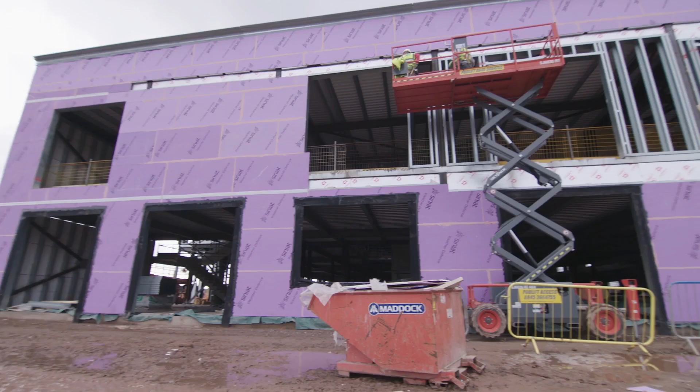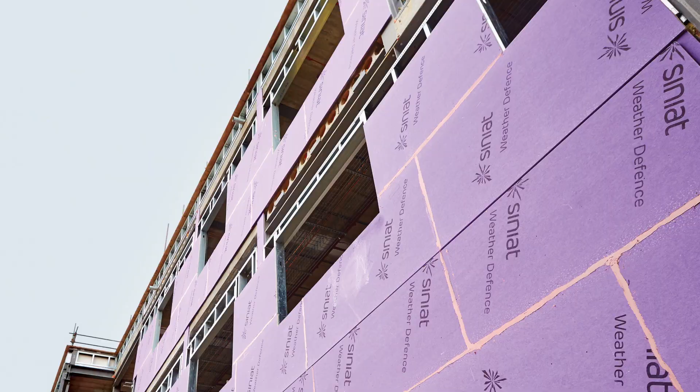Weather Defence is an external sheathing board, which is now often used instead of cement particle board. It's made from gypsum and has a water-resistant liner. It has been around since 2013, and a second generation version launched in 2017, which can now be left exposed on frame for up to 12 months.

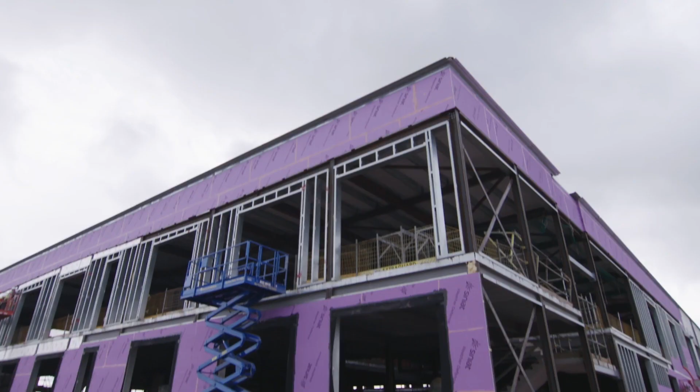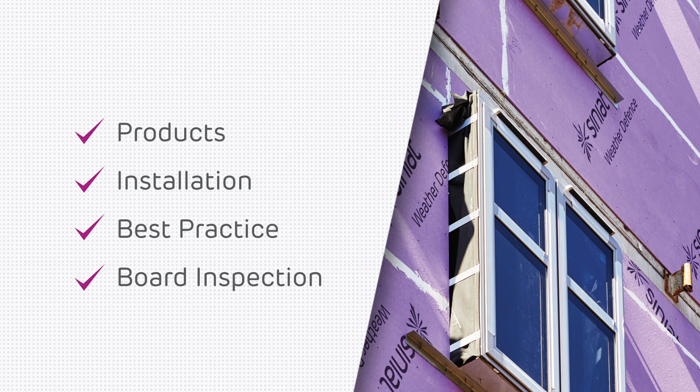The big benefit is that it's easy to cut, and therefore fast to install. This video will show you how to install Weather Defence correctly, looking at products, installation, best practice, and board inspection. First, let's take a look at the products you'll need.

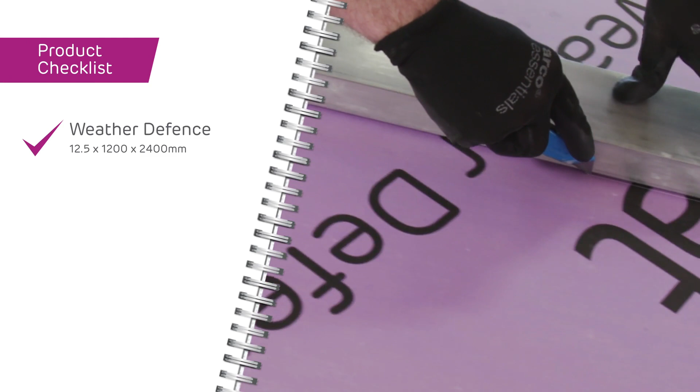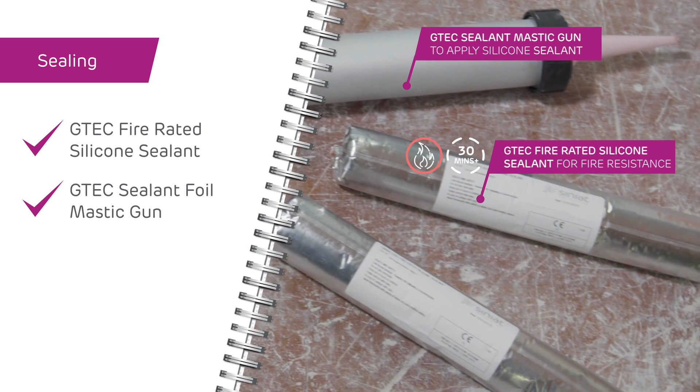The Weather Defence board. Special GTEC wet area screws. These are for external use and have a salt spray resistant coating. And you'll need to seal the joints either with fire-rated sealant silicone or with Weather Defence joint tape, which can be used instead of silicone sealant in all other systems. To cut Weather Defence, you use a Stanley knife or similar.

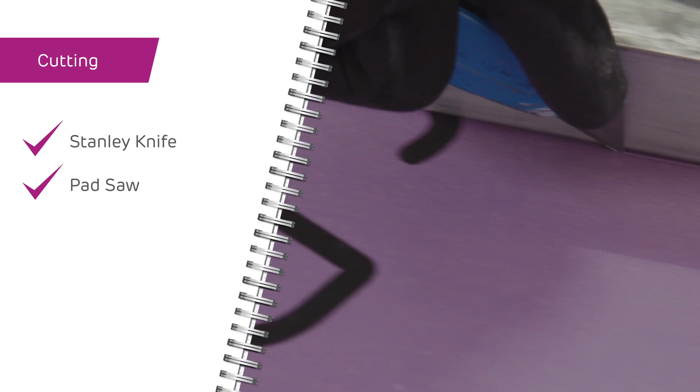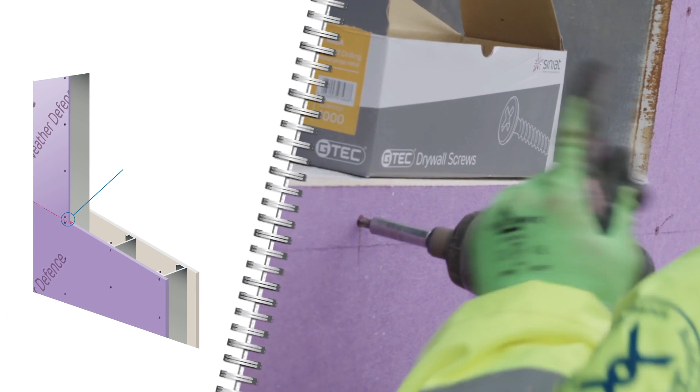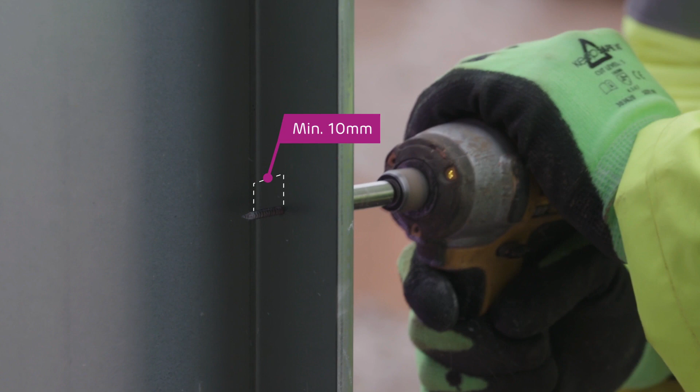In most cases, boards are installed horizontally in a staggered brick bond pattern. But if necessary, boards can be installed vertically to suit window openings and sizes. Place screws at least 13 mm and no more than 20 mm from board edges, and penetrate at least 10 mm into the substrate, or 25 mm for a timber frame. Fix to studs at a maximum of 300 mm centres.

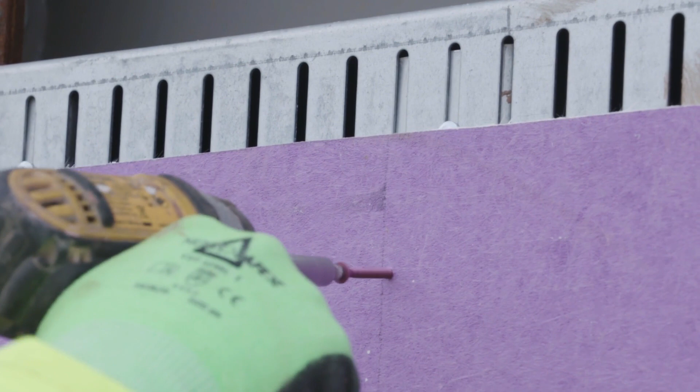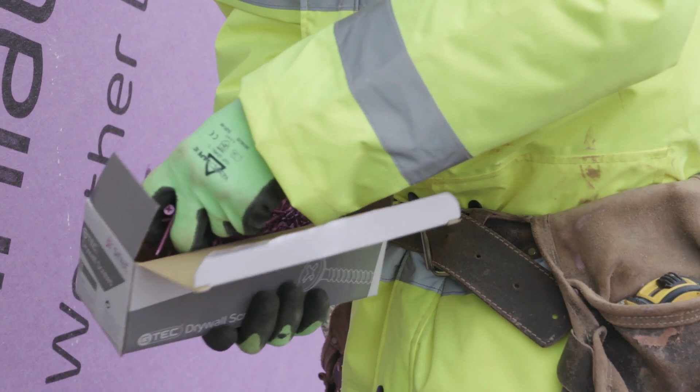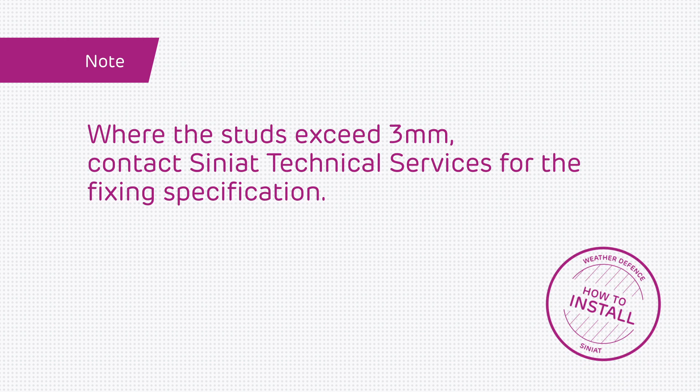If your project requires a higher wind loading, the fixings and studs will need to be at closer centres. Ask your project engineer about this. Use GTEC wet area self-drilling screws for steel studs or combinations of studs up to 3 mm thick in total. Where the studs exceed 3 mm, contact Siniat Technical Services for the fixing specification.

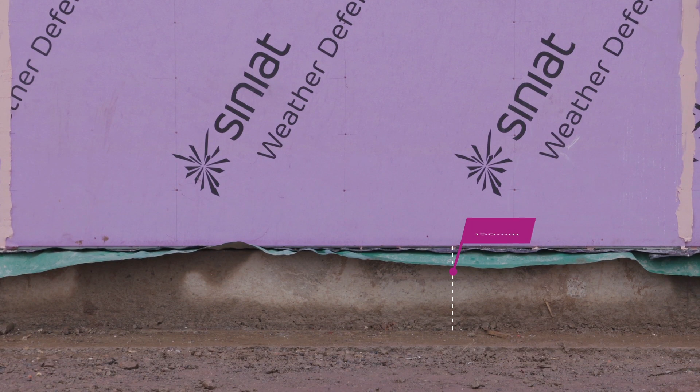Although Weather Defence doesn't mind getting wet, separate the board from areas where water may pool by at least 5 mm. Boards should also be installed above the DPC level and 150 mm above ground level.

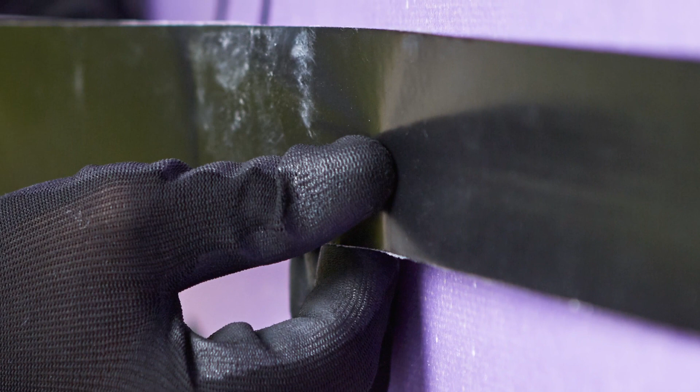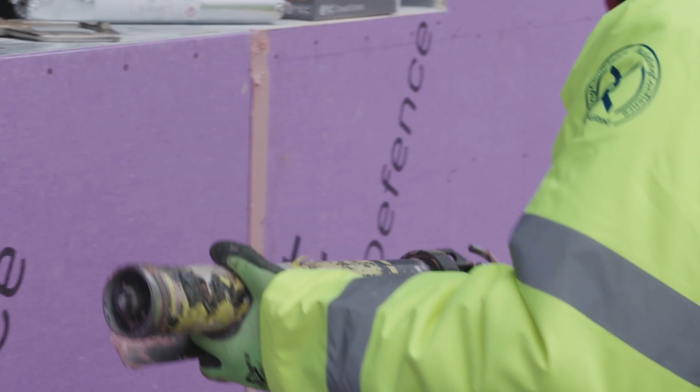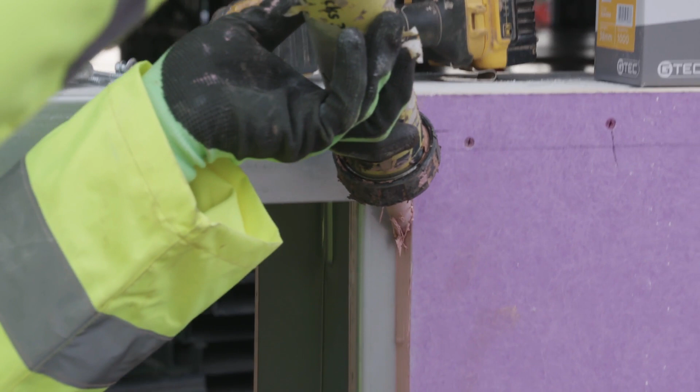Which sealing option you choose depends on your project requirements. Weather Defence joint tape may be used when only air and rain tightness are required. But if you also require fire and sound resistance, the Siniat fire-rated silicone sealant should be used. A silicone sealant provides a robust weather seal as it allows two boards to be squeezed together to prevent water and air leakage. As boarding progresses, apply the sealant along the previously fixed board edge before installing the next board.

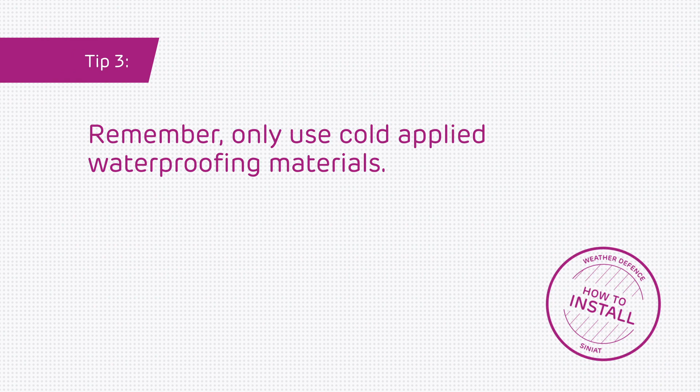You should aim to create a sealant joint of approximately 2 mm when the next board is loosely butted into place. Any gaps in the sealant should be filled with additional sealant. If a screw isn't perfectly flat, seal with a dab of sealant to prevent issues with weather tightness. Remember, only use cold-applied waterproofing materials. Cold-applied sealing methods should be used to seal deflection or movement joints created in the board layer. Compatibility with silicone sealant should be checked.

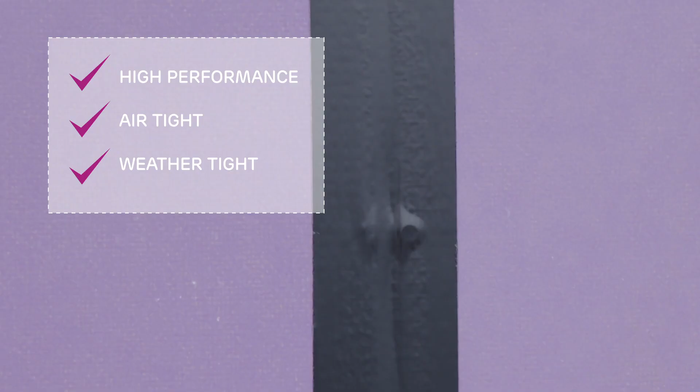Weather Defence joint tape provides a high-performing air and weather-tight seal between boards and can be used instead of silicone sealant in non-fire-rated systems. Weather Defence joint tape should not be used in combination with silicone sealant. If unavoidable, use an appropriate primer over the silicone joints before applying tape. Contact Siniat Technical Services for help with the correct primer. Weather Defence joint tape can be applied any time within the 12-month exposure period, but of course, before the joints are sealed, some water may penetrate.

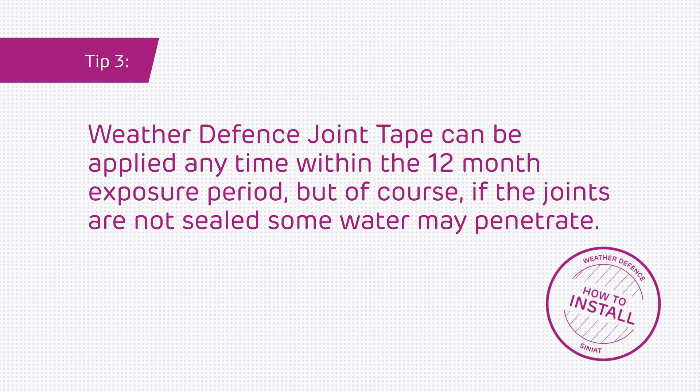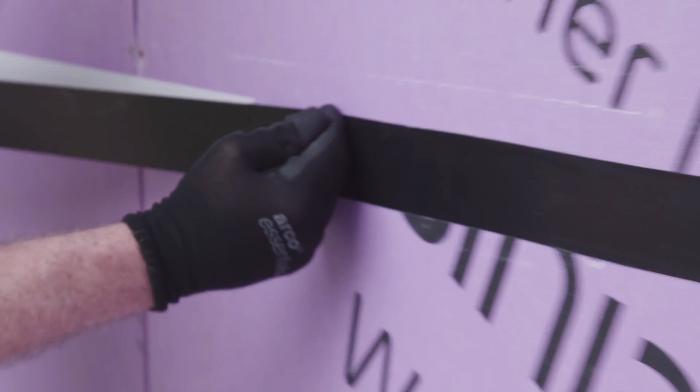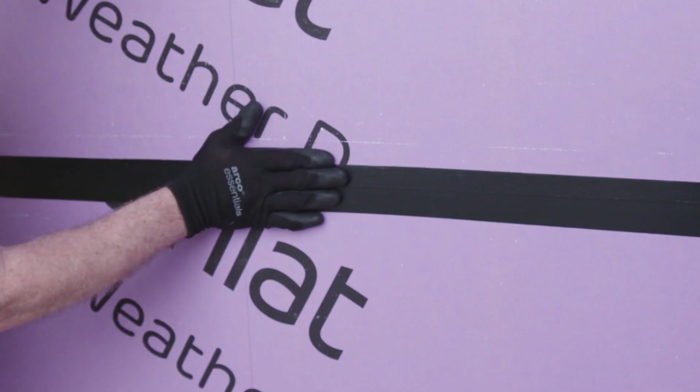Before application, ensure the surface is clean, dry and free of oil or dust, for example, as significant contamination will mean the tape does not adhere properly. Position the tape along the centre of the joint and peel back the backing paper as you progress. This will usually cover screw fixings. Apply the tape carefully, avoiding wrinkles or being overstretched. Firmly press and smooth down against the Weather Defence board.

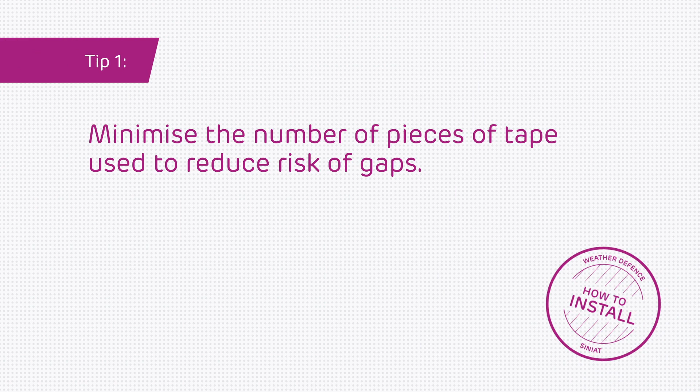Seal horizontal joints first and run tapes for vertical joints over the top of the horizontal band of tape. Minimise the number of pieces of tape used to reduce risk of gaps. If using tape pieces is unavoidable, overlap tapes by a minimum of 50 mm and ensure they are pressed firmly against the board and fully sealed.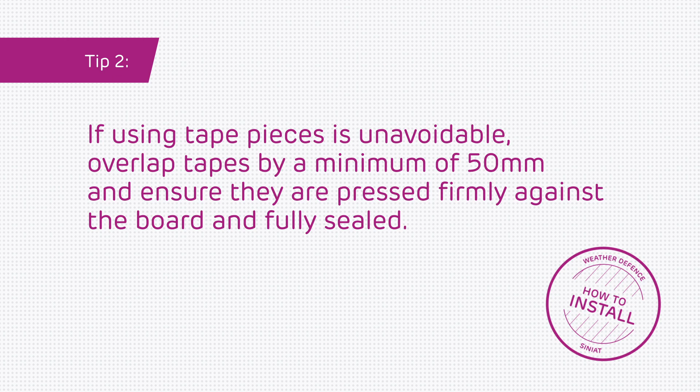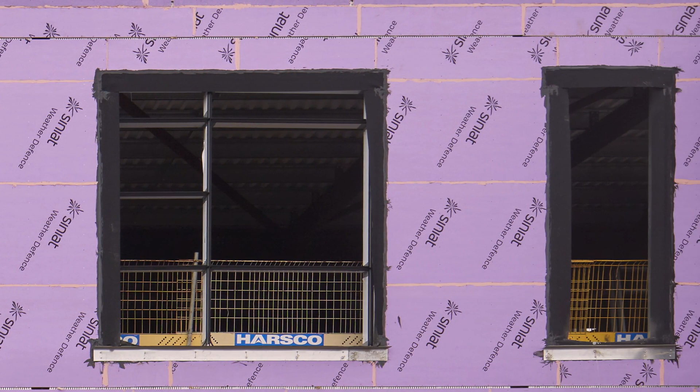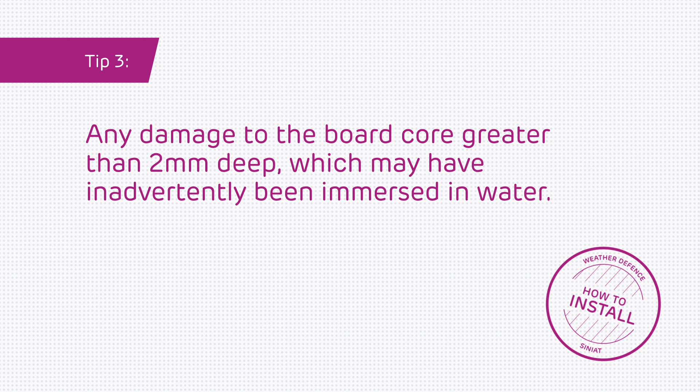Before covering Weather Defence with insulation or other cladding, and after extreme weather, we advise you to inspect the boards to ensure that they are free from damage. We advise paying particular attention to any areas where multiple attempts have been made to fix a screw in case it has created a hole, any facer damage greater than 5 mm, any damage to the board core greater than 2 mm deep which may have inadvertently been immersed in water, any significant dents, scrapes or tears which have occurred during the construction.

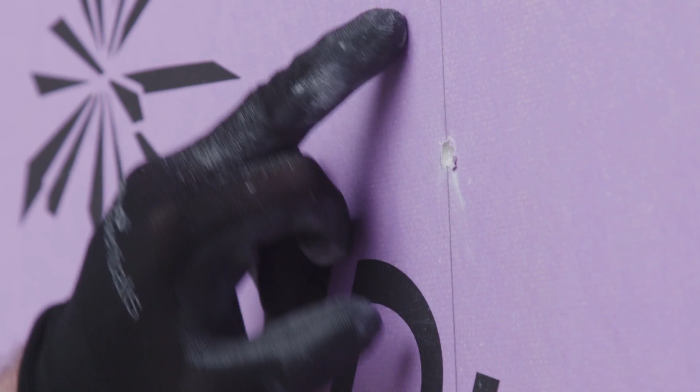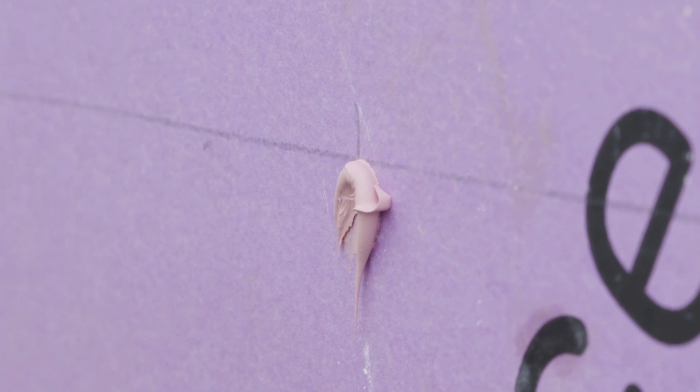Small areas of damage up to 15 by 15 mm and a maximum of 3 mm deep may be corrected using Siniat fire-rated silicone sealant or Weather Defence joint tape. Any damage which is up to 300 by 300 mm and a maximum of 5 mm deep may be resolved by filling with Siniat Aquamix water-resistant compound.

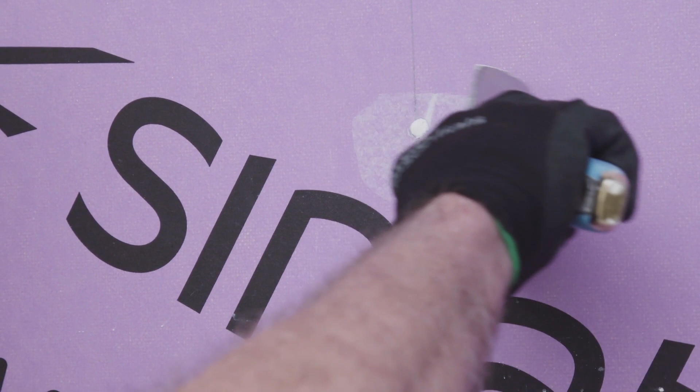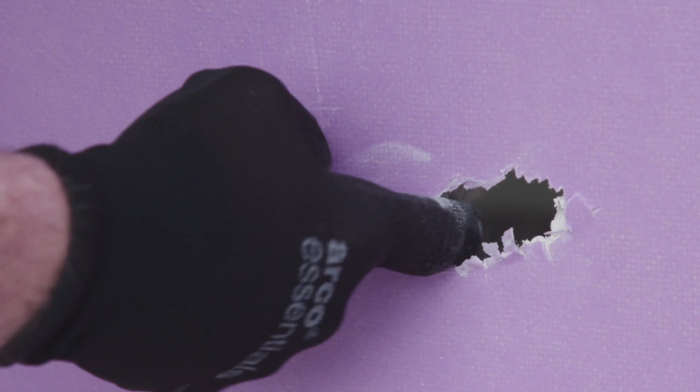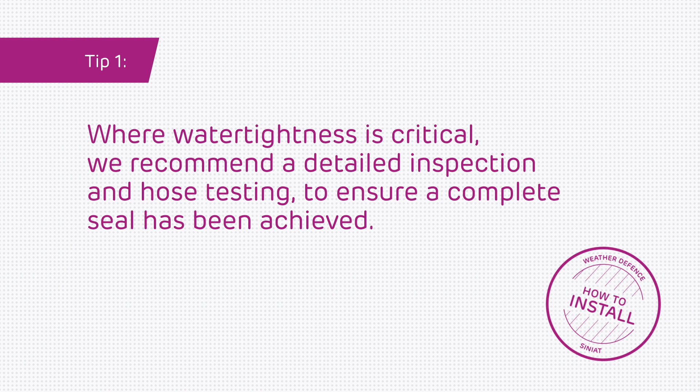If any damage is larger than an area of 300 by 300 mm, or if the board has been perforated, then this board must be replaced. Additional metal noggins or straps may be required to support the new board. Where water tightness is critical, we recommend a detailed inspection and hose testing to ensure a complete seal has been achieved.

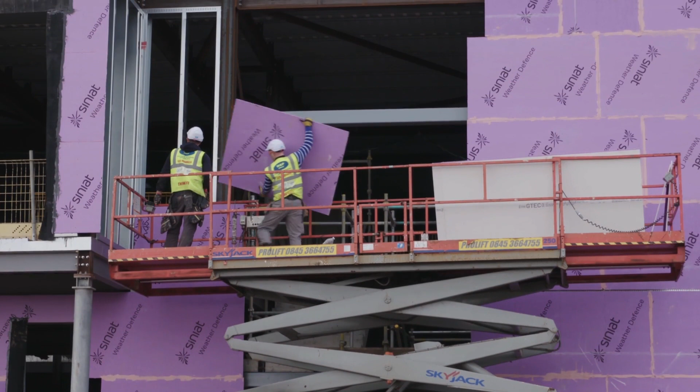Weather Defence should be stored on site in dry, flat conditions. It should not be used as a platform or deck because it will not support body weight. So it's important to use an independent support mechanism. As Weather Defence has a gypsum core, offcuts are fully recyclable.